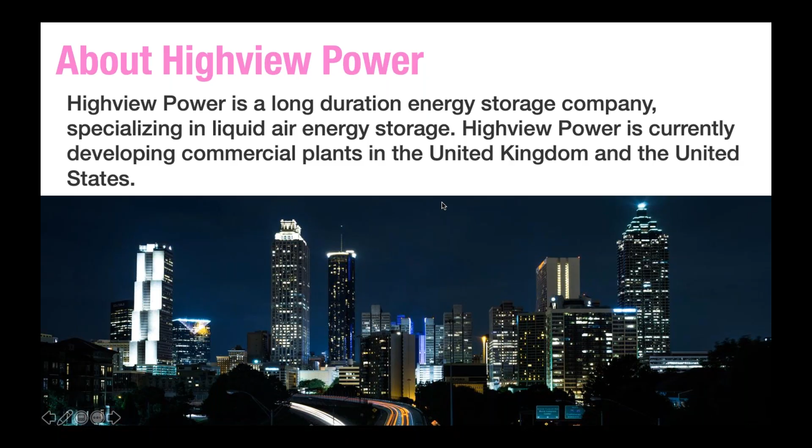And today we'll hear a lot more from Richard, who brings a ton of experience as an engineer and recently, bringing Highview Power, opening up their offices in New York, and really focusing on the development of the new technology, liquid air energy storage. Many of you know me. I've been in the industry for over 20 years, working at the North American Electric Reliability Corporation, the U.S. Department of Energy, and recently as an advocate and joining as the new ED for long duration energy storage, which is really important, and I'm really excited to be part of this organization to promote the education of how we can meet California's climate goals and be part of the solution.

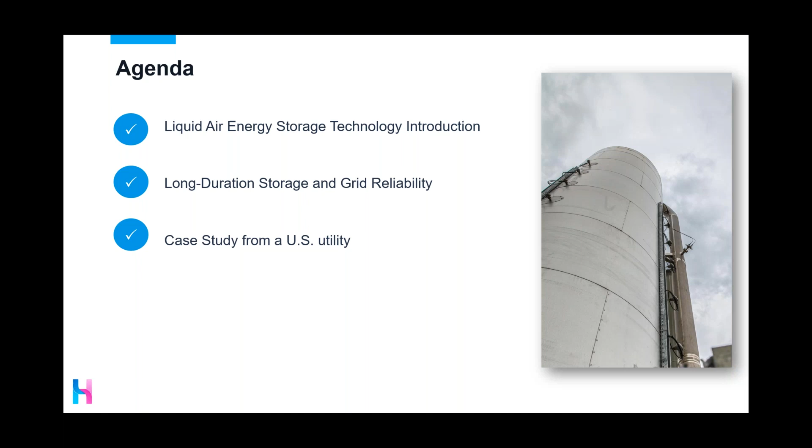And then I'm going to move on to a case study for a US utility that we've recently undertaken that attempts to tie together the multiple functions of energy storage in the network, including reliability and energy, and to evaluate, on a holistic basis, the lowest cost portfolio of energy storage comprising both short duration and long duration. And I think it highlights some interesting dynamics, and provides one way of distinguishing between what a long duration and a short duration system is.

So regarding the technology, this is really just to set the scene and place the technology in the spectrum. We have been developing liquid air energy storage for 15 years, and our fundamental philosophy is to utilize proven components and processes from adjacent industries so that we can rely on fully established supply chains, warranty arrangements, and what have you. So the technology itself is founded upon the same processes used in industrial gas and power generation.

A liquid air energy storage system basically is a composition of pipework, heat exchangers, rotating machinery, and tanks. And the dynamics of that composition make this technology particularly well suited to high power and long duration applications, by which I mean greater than 50 megawatts and greater than 4 hours of duration. The economies of scale in the rotating equipment that we use for our power systems mean that the larger we build the system, the more cost efficient it is in terms of dollars per kilowatt. In the duration axis, we achieve longer duration by building a higher volume of tankage to store liquid air, and that's a low cost thing to do. So we can very cost effectively arrive at tens of hours of duration by expanding our tank volume.

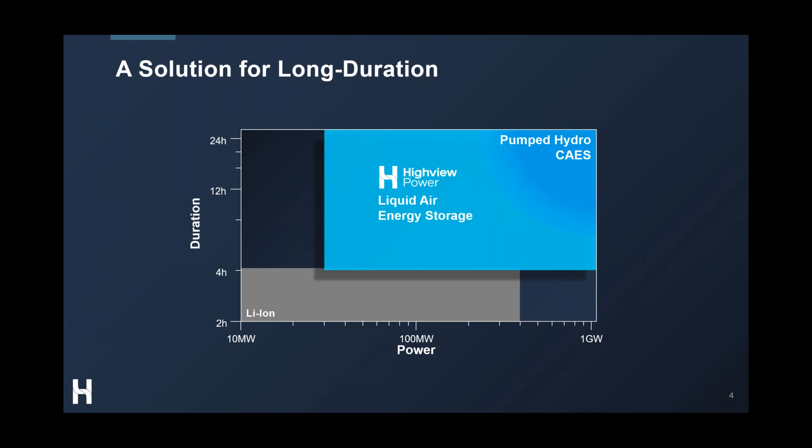And so we end up with a system that really straddles the gap between the 4-hour lithium ion systems that we've seen deployed in very large numbers in recent times, and the very large energy storage systems like pumped hydro and compressed air, which can be very cost effective, but are very large scale and obviously require specific geography in order to be deployed. By contrast, we have a system that can sit in a relatively small packet of land above ground and be flexibly located, and as a consequence, more easily developed.

So this is what a liquid air energy storage system looks like. The render on the left is the 50 megawatt modular system that has been released for construction in Europe, and with which we have multiple projects in the US in late stage development. It's a 50 megawatt standardized module, and the energy capacity of the system is dictated by the volume of tankage attached to that power module. In the render, you can see a 400 megawatt hour system, so a 50 megawatt 8-hour system. That system occupies about 4 acres, so it's very compact, and we'll go into some of the additional benefits of the technology in a later slide.

This system is building on the experience derived from the two systems on the right. The first is a pilot system that was the first fully integrated liquid air energy storage system in the world, built and operated by Highview, and then latterly a 5 megawatt demonstration system that has been used to demonstrate the provision of real grid services in the UK national grid, providing operating reserves, frequency response, and also some services still under definition in the UK, such as inertial response, remunerated reactive power response, and fast frequency response as well.

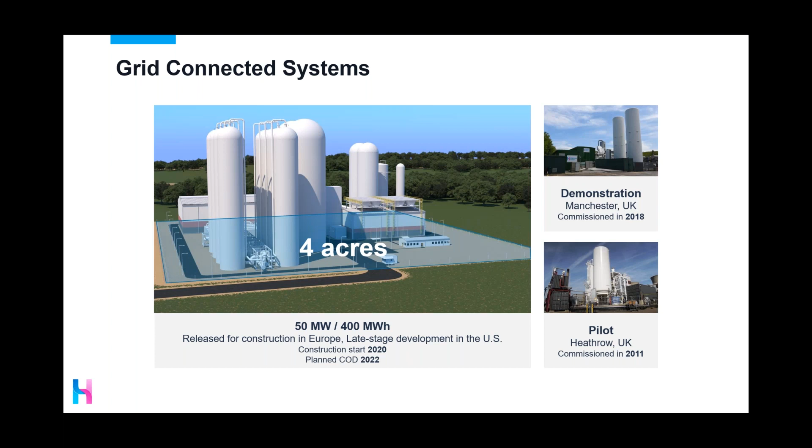So how the system works: as I mentioned, we're repurposing processes that already operate in other industries. The first part of the system is an industrial air liquefier. This is basically a large compressor-loaded refrigeration system that draws in ambient air and cools it down until it becomes a liquid. It's based on the Claude cycle, which is over 100 years old and has been the predominant way of producing liquid air to then produce the component gases, nitrogen and oxygen. So we're taking in air, running a set of compressors, compressing it, cooling it, and then expanding it back down to a low pressure, at which point it condenses into a liquid state. And that liquid air is in the same proportions as ambient air.

It's 700 times denser, so it can be stored in a reasonably small space. And most importantly, it's at low pressure. So we're able to store that liquid air in steel tanks that can be constructed above ground without the expense of containing high pressure. And those tanks essentially resemble large thermos flasks. So they're very well thermally insulated. They're designed to contain a moderate pressure of about 15 atmospheres.

And the liquid air will sit in those tanks for many weeks with minimal loss because the tanks are very well thermally insulated. When we want to recover energy from the system, we extract the liquid air from the tanks, we pump it up to high pressure, and then we reintroduce heat, and we end up with a high temperature, high pressure gas, which is very similar to steam, except that it's dry air, which is one of the most benign fluids that any system could use.

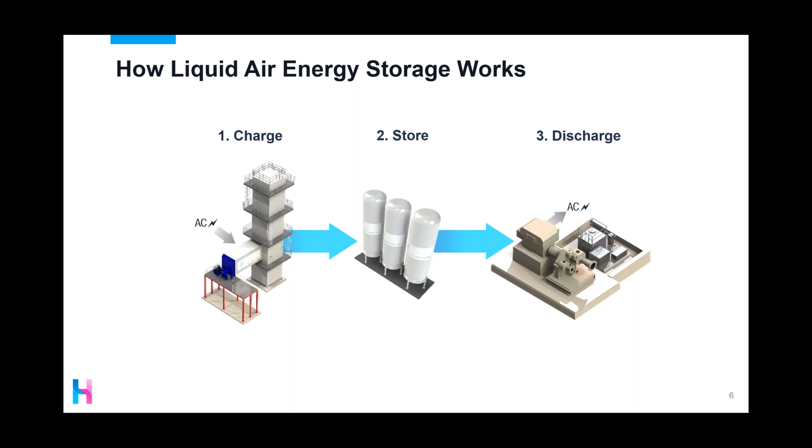And so to close the system, we have thermal recycling within that process. So when we cool air to liquefy it, we're obviously extracting heat. We take that heat out, we store it in a thermal store, which is essentially, again, steel vessels. And we deliver it to the interstage reheat on the turbine, which is a 4-stage turbine, and we use that to recover additional energy from the system. So there's no combustion within this process, it's entirely self-contained, and we use heat internally derived from the process.

And then similarly, when we take liquid air and we raise the temperature to ambient and beyond, we're extracting a lot of cold energy. We store that cold energy inside, again, steel tanks, this time containing a gravel medium, so a packed bed of rock, which stores that cold, and later we extract that cold and we deliver it to the air liquefier to do some of the cooling on the charge system.

So we end up with a process that's up to 60% efficient, and it's comprised of 3 entirely independent subsystems. So we have flexibility on sizing the charge system up or down so that we can charge faster or optimize CapEx depending on the requirement of the system. And similarly on the discharge. And then finally, the storage is the tankage in the middle holding thermal energy, heat, liquid air and cold.

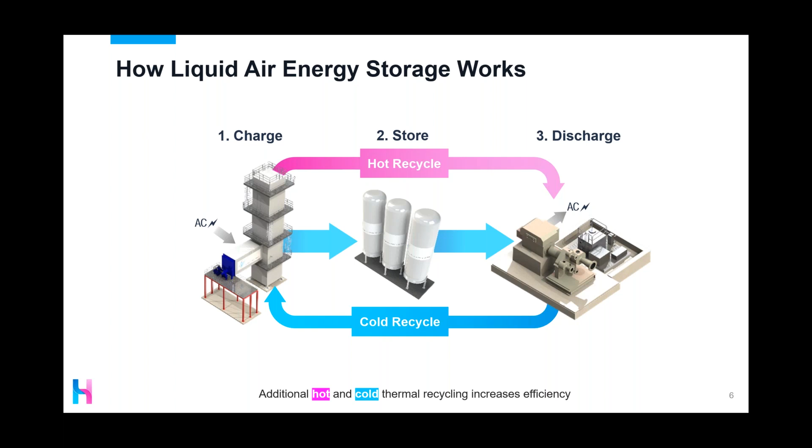And expanding the duration of that system is the lowest cost component of the overall system. So that's just a case of building larger tanks or more tanks, and we can very efficiently build out the duration of the system. And we can also do that as a retrofit to provide flexibility as grid needs evolve. We can add duration to the system.

So overall, we end up with a system that is easily sited on a small footprint with no geographical constraints. So if you can build a traditional industrial process on that land, like a power plant, you can build this system. We're using components that typically are designed for a life of 30 years. And as with any thermal generator comprising very similar equipment, you can expect to extend that duration by overhauling certain items of equipment at 30 years based on their condition. And it's not uncommon to see 40 years or more from those kinds of systems.

The process fluid and the fluids used to store heat and cold are fundamentally environmentally friendly. There's no emissions, no combustion, no effluents from this system. So essentially what it does is it takes in air from the atmosphere and it puts the air back out to the atmosphere in exactly the same composition.

And then we're using a fundamentally non-combustible set of storage media to store our energy. And that means that we have a very safe construct. There's no need for active safety systems to keep this process safe. So we have very low fire risk, and essentially if we lose power to the system, we can walk away from it, and there are no emerging issues from not being able to supply power in the time it takes to restore that power.

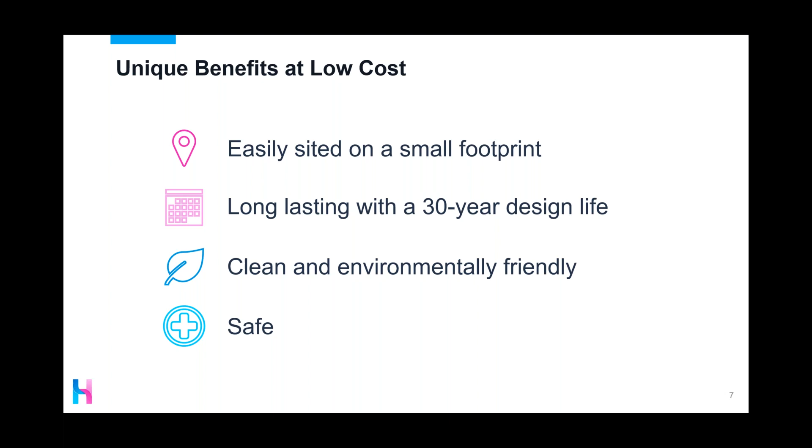Okay, so that's a quick tour of the technology. Now, obviously, energy storage in general performs multiple functions in an electricity system. Today, we're going to consider two of them. The first being broadly characterized as energy. So the most intuitive justification for energy storage and for long duration energy storage is obviously looking at the increasingly long periods of time that we're going to need to cover when renewable energy is not available, but we still need to serve load.

So if we assume a system like in California with a lot of solar and very little wind, we're looking at around 16 hours of the day where we're going to have to find solutions to plug that gap when the sun is not producing significant amounts of energy. So that's the energy justification. And the second aspect that I want to look at is reliability. And this is a big topic in California and elsewhere in the world, and arguably will be the most pressing consideration in the initial deployments of long duration energy storage.

So historically, we've had about 100 or 150 years of power generation, based on fossil fuels. So we've had systems that can provide essentially fully dispatchable generation. And we've become accustomed to a reliability that effectively equates to about one day of outage every 10 years. So this is all about keeping the lights on with very, very high reliability. One day of blackout every 10 years is really quite an impressive feat and testimony to the planning and organization of utilities and the body of knowledge built up over 100 years.

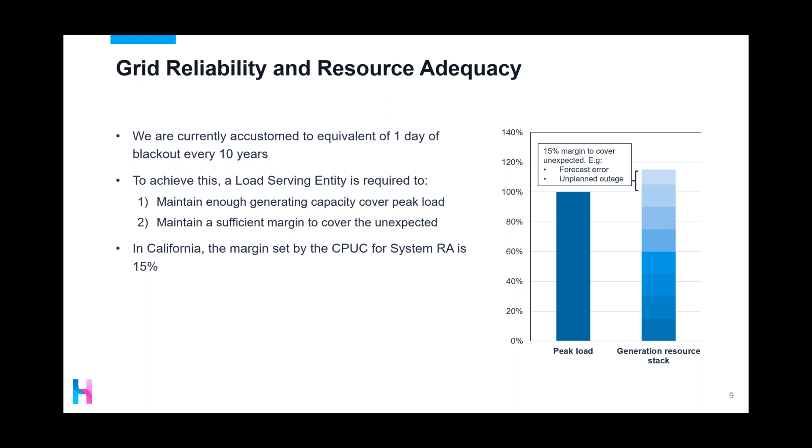And in California, that margin for system installed capacity is defined as 15% of peak load. So broadly speaking, a system is deemed to have resource adequacy if it maintains 115% of its projected peak load. Now, this question becomes more complex when you consider energy storage. Many decades of experience have proven that a 15% margin is adequate to maintain reliability, but on the basis of completely dispatchable conventional generation, notwithstanding outages or fuel constraints, which do exist.

If we consider a perfect conventional generator, it's basically available for as long as we need it, whenever we need it. Clearly, energy storage is not. By definition, it has a limitation on its duration. So a 10-minute energy storage system, for example, will not be able to replace a conventional generator. And as we have longer and longer duration, we approach the ideal case, which is unlimited generation. So while a conventional generator can provide, in idealized terms, unlimited generation, it doesn't need to be able to do that.

It needs to be able to provide enough power for long enough. And the big question in all the power grids today is how long is long enough to provide firm capacity? And the undisputable fact is that it is linked to the duration of the system. It's just a question of how long, at what point we arrive at full firm capacity.

And the way that is typically measured is to evaluate the loss of load that would be expected with a perfect generator, and then to look at energy storage of a particular duration and say, okay, in comparison, how much load is lost, and from that you can derive a firm capacity equivalency, which is often known as capacity value of your energy storage system.

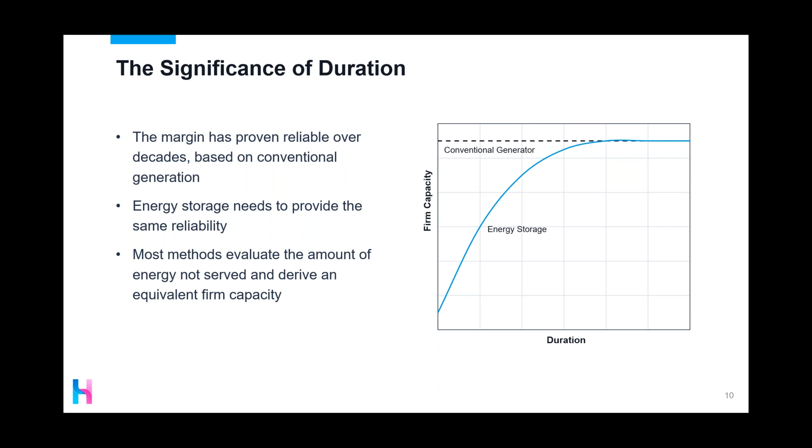So from here, I'm going to dive into a case study, which I hope will provide a better illustration and hopefully tie some of these concepts together. And what we've essentially done, we've worked with a utility in the United States, reasonably small utility with 5 gigawatts of load, vertically integrated. And they are building out significant amounts of solar over the next 5 years. And they're also retiring conventional generation.

So they find themselves in need of about 200 megawatts of additional capacity in order to cover the reserve margin that they're obliged to hold. And so we set out to work with them to look at a portfolio of long and short duration energy storage and to understand what an optimum mix might look like to respond to that need.

So the objective essentially is to provide the lowest cost for 200 megawatts of firm capacity while maintaining equal reliability to the present situation. And an important factor is that they don't want to rely on imports in order to provide reliability, because doing so amounts essentially to relying on a neighboring grid that may not be as aggressively decarbonizing as the system that we're looking at. So importing from a less decarbonized grid is treated in this analysis as a last resort.

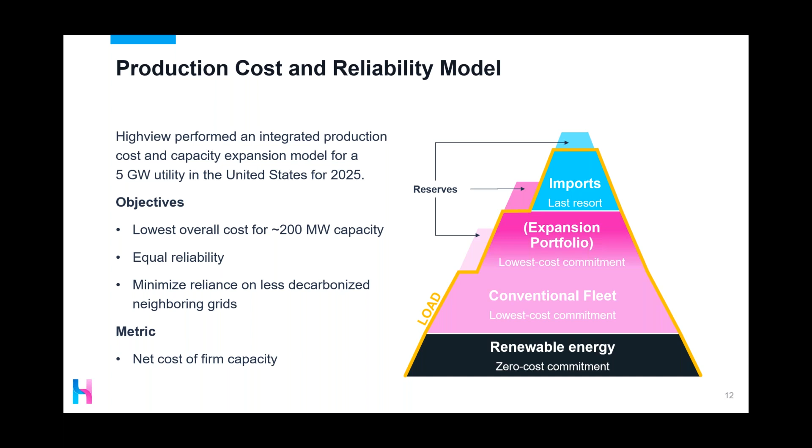And the metric that we're using here is the net cost of firm capacity, which I'll look at in more detail. So this is how we evaluated the system. We established a baseline based on the generation that already is going to exist in 2025. We produced a production cost model that incorporates the cost of generation, cost of starts and fuel, and everything that's needed to produce a production cost. And then we evaluated individually different options for energy storage within that system.

So we took the predominant short duration technology, which is lithium ion, and we defined 5 system options using lithium ion, so 2, 4, 6, 8 and 10 hours of duration. And then we did the same with liquid air energy storage, which obviously we define as a long duration system, but ultimately we're treating them both on the same basis here. And we'll see in later slides how the dynamics of the two technologies are quite different.

So we take the baseline, we evaluate the storage system in that baseline for both its contribution to reliability and its benefit in terms of minimizing the production cost of the system, which means dispatching solar energy essentially into the peak hours and avoiding things like system starts on inflexible thermal generation. And so we figure out what is the lowest cost option. We integrate that lowest cost option and we establish a new baseline, and then we evaluate the next option in the system.

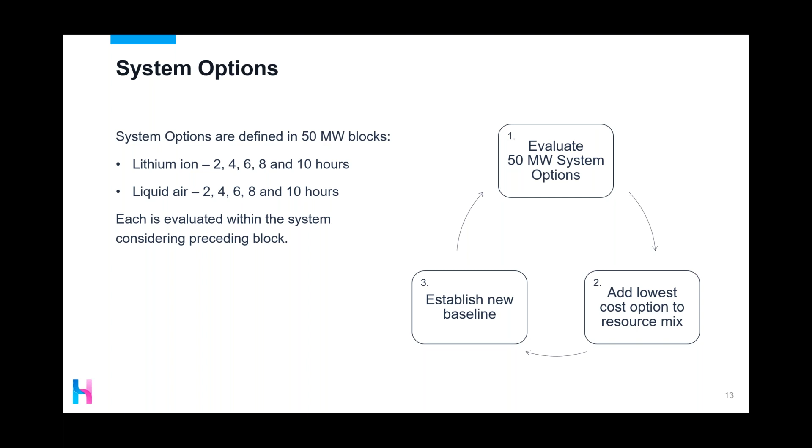The metric that we use to compare is the net cost of firm capacity. So we take the gross cost of the system on an annualized basis, so the cost to cover CapEx and OpEx. We then evaluate that system in the production cost model and determine the benefit to the production cost, and we net that benefit off the overall cost of the system. And the remaining cost is the net cost of the system. And we normalize that by the kilowatts of firm capacity that energy storage system can claim in this utility's system.

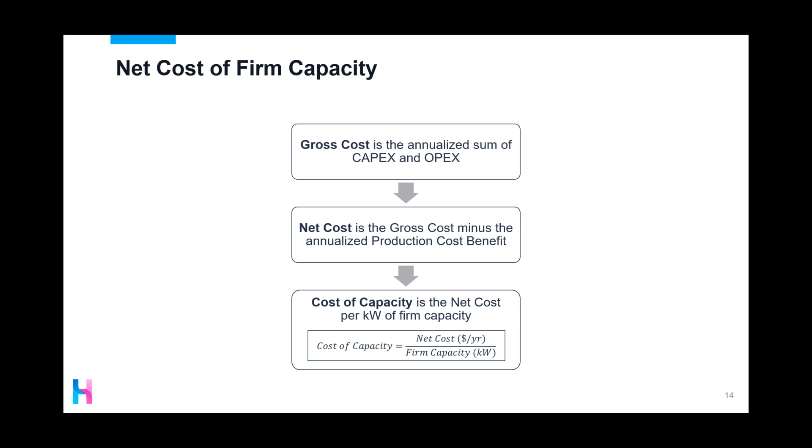And so another key component is the firm capacity calculation. So what we've done is we've compared the loss of load expectation. We've used an effective load carrying capability method. And we've evaluated the storage options against a perfectly dispatchable conventional alternative and determined a firm capacity equivalency as a function of duration. And we've done that individually for each technology. And we found that actually the technologies are very, very close.

So we have incorporated a capacity value, essentially a firm capacity value for each individual technology, but they're very close to each other. And what we find is that we need between 8 and 10 hours to provide the reliability of a conventional generator in that system.

So on the subject of duration, this is a hot topic in California. It's a hot topic elsewhere in the US. There's a lot of discussion around what constitutes firm capacity. And it is a function of the network. It's a function of the penetration of renewables. It's a function of penetration of storage. And the important thing is to understand and evaluate that and to fully quantify it within any energy storage evaluation.

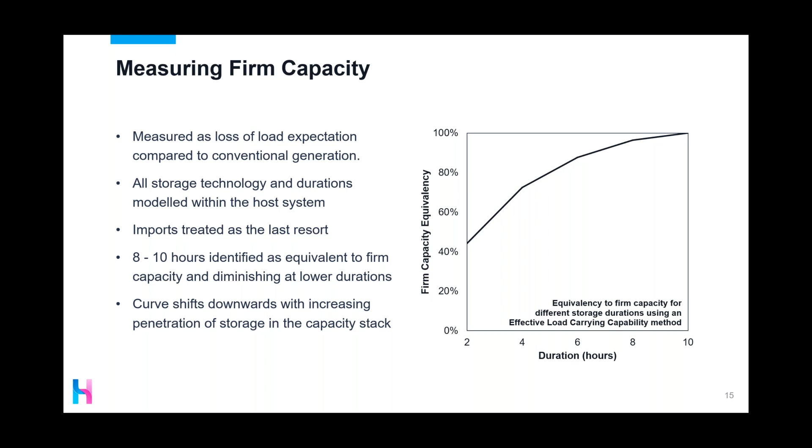And so with the short duration option, the effective cost of building out that duration increases as we increase the duration. So ultimately, the cost of building out the duration outweighs the benefit of that duration within this system.

Conversely, with the long duration energy storage system, initially, because of the very low cost of building out duration, you can actually derive more benefit from that duration than you derive cost. So we find that the cost of firm capacity actually reduces as you build out the duration, and then we find an inflection point beyond which additional duration is less and less useful, and the cost starts to turn in the opposite direction.

And ultimately what we find in this first tranche of energy storage in the stack is that we're looking at a system with quite a lot of opportunity for energy arbitrage. And so a technology like lithium ion, which is efficient and low cost for short duration, is able to provide greater value into the system by moving energy around. And it does provide some firm capacity contribution as well. So we find that it makes sense to build a shorter duration system in this case. But that situation evolves as we build more and more storage into the stack.

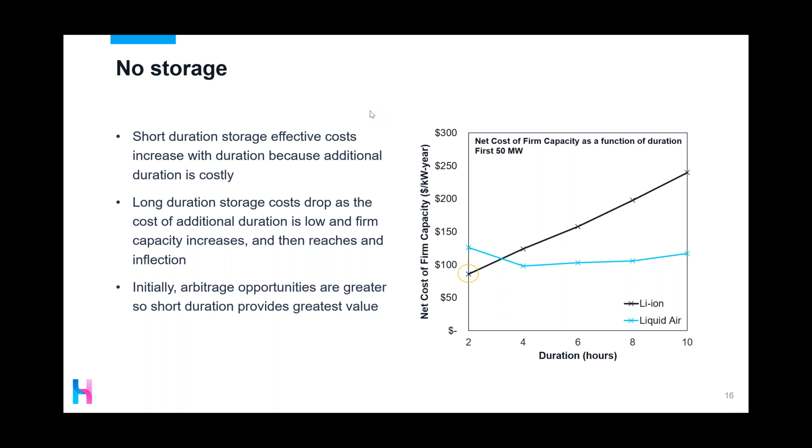And so we start to see another effect of that reliability becoming more important, and that is that the inflection point for the long duration system is starting to move to the right as more duration becomes more valuable.

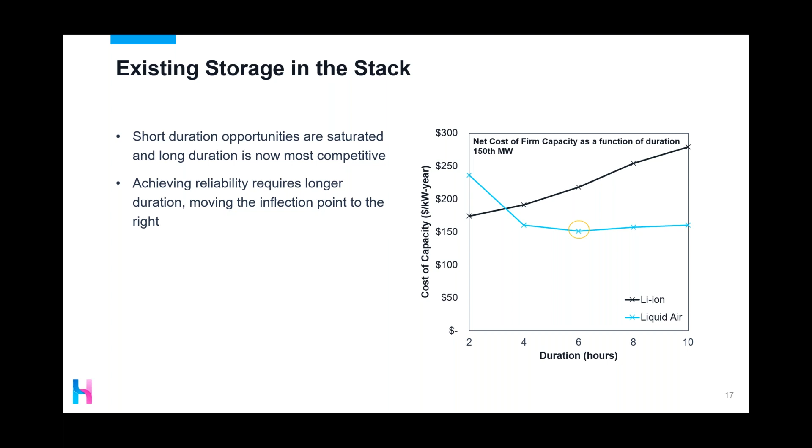So looking at this on the basis of the whole stack, what we found in this particular system, and I think this is really a conclusion that is universal, is that the most cost-effective capacity stack is ultimately going to require a mixture of technologies. In this case, we've looked at lithium ion and liquid air as a short duration and long duration technology. And we find that we need between 50 and 100 megawatts of lithium ion, a relatively short duration. And then we become optimal with 100 and 150 megawatts of liquid air with longer duration.

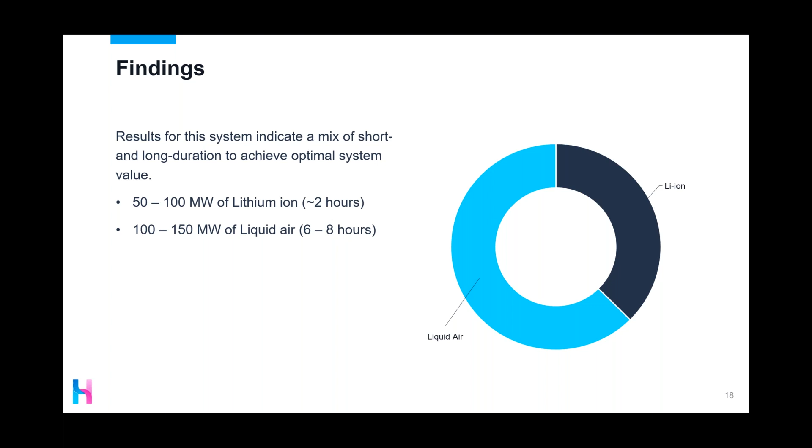And obviously, this is an analysis, so we foresee that once you take into account project economics, there will be an area where both technologies probably compete well, and it will come down to project economics. But eventually, you need to introduce longer duration if you want to maintain a reliable system. And while the specifics of that statement depend on the system that you're looking at, the constraints on that system and the resource mix, I think it's fair to say that's a universal effect.

So in conclusion, we see that ultimately you can actually compare multiple durations by looking holistically at the functions that energy storage provides in the network. So we have here considered production cost or energy and reliability. And we've been able to define a metric that allows us to look at a spectrum of durations and determine when long duration makes sense.

And duration is closely tied to the reliability aspect of that value. So while in larger systems, obviously, there will be a greater potential for shorter duration systems to provide their value, ultimately, as higher penetration exists, longer duration energy storage will be needed. And that effect is exacerbated in load pockets and smaller systems. So when you start to account for grid topology and local factors, you can see that effect is actually amplified.

And a truly holistic evaluation will obviously include other sources of value that haven't been quantified here, like locational value within the system, T&D deferral, reactive power, inertia, and other features of various energy storage technologies that will become more important as we decarbonize to a greater and greater degree.